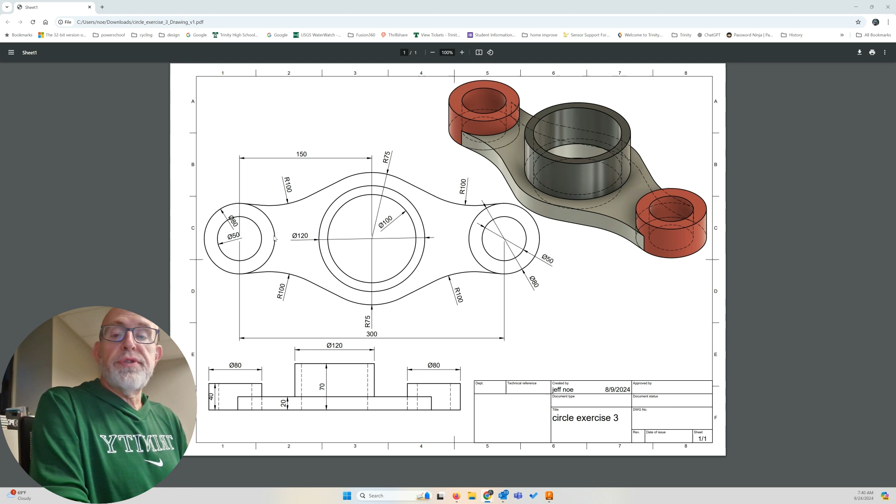We'll extrude this sketch 3 times. We'll extrude this and this. Those will go up 40 millimeters. And last, the center ring, that'll be extruded 70 millimeters. So let's get started. Move this out of the way. I've got a fresh canvas in front of me.

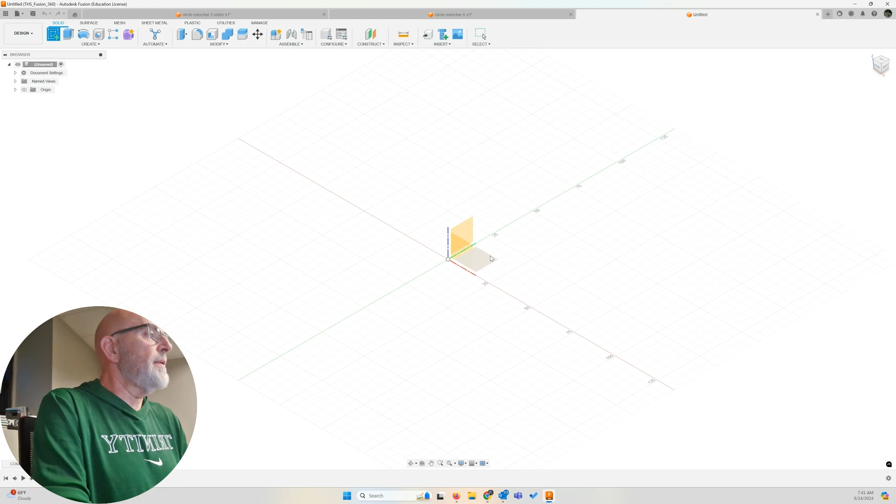All right, let's go create sketch. Top, bottom plane. There we are. You see top in the view cube up here. Let's draw our first circle from the origin at 100 millimeters center diameter. So center diameter circle, create circle, center diameter circle. Keyboard shortcut of C. You see the shortcut in the toolbar. There we are.

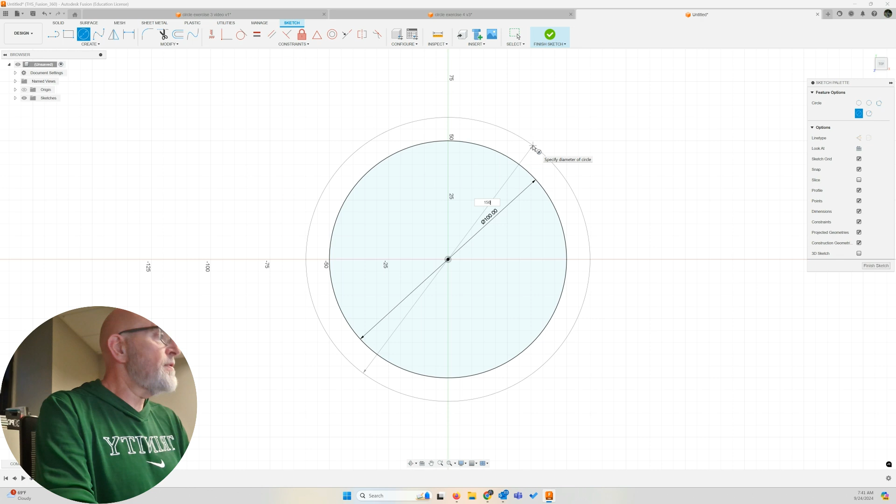All right, now let's draw a second circle, our radius of 75 from the design. Keep looking over there like you all can see it, and you can't see it at the moment. So 150 millimeters. And there's the outer circle. Of course, we're going to trim away sections of that.

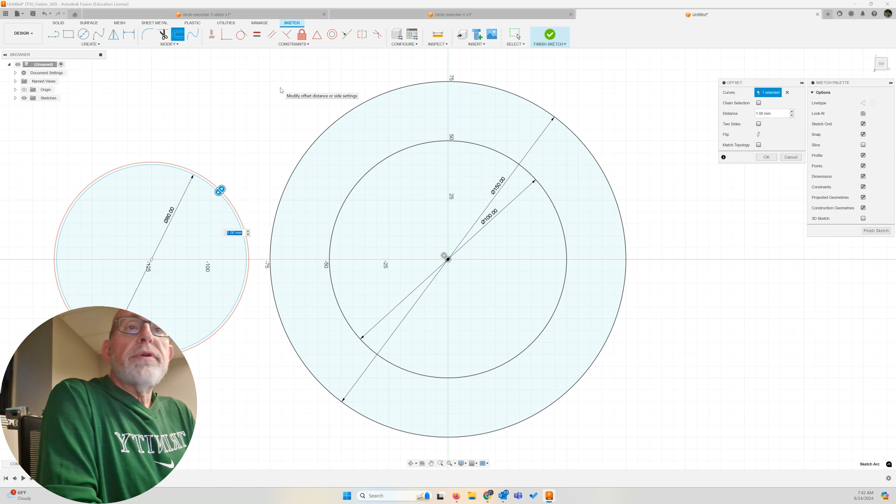Let's draw on the left side our smaller circle. So the first one's going to be 80 millimeters. 80 millimeters, all right. And we're going to offset that, modify offset. So the inner circle's 50 millimeters, 30 millimeters smaller, so our offset will be a negative 15 millimeters.

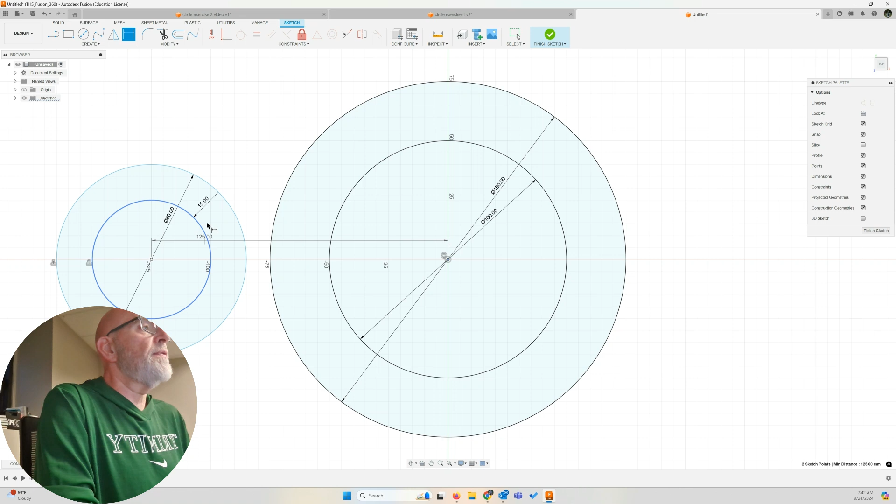Now let's position this circle. The distance between the center of this circle and the one on the other side is 300 millimeters. So from the origin, it's going to be 150 millimeters. So let's go sketch dimension, create sketch dimension, keyboard shortcut of D, the origin to the center of those circles. We'll set it to be 150.

I'm going to move my design over a bit. There we go. Zoom out just a touch, give me some more room. Okay, actually, let's move it up higher. I'm going to go create circle, center diameter circle. I need to create an arc with a radius of 100 millimeters that's tangent to these two circles. We haven't covered the arc tool yet, so we're going to use the circle tool.

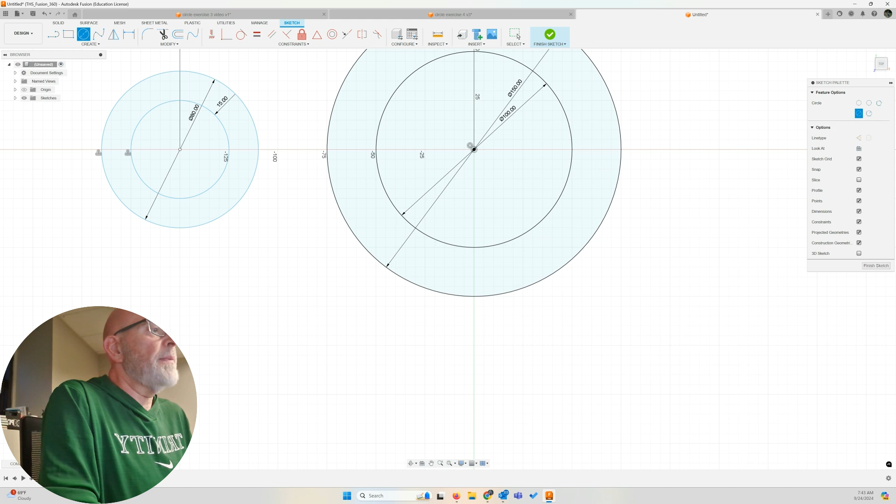Let's go create circle, center diameter circle, and I'm going to come down here and let's draw it with 200 millimeters in diameter. Let's go constraints, tangent. I want to make this circle tangent to this circle. There we are. And this circle tangent to that circle.

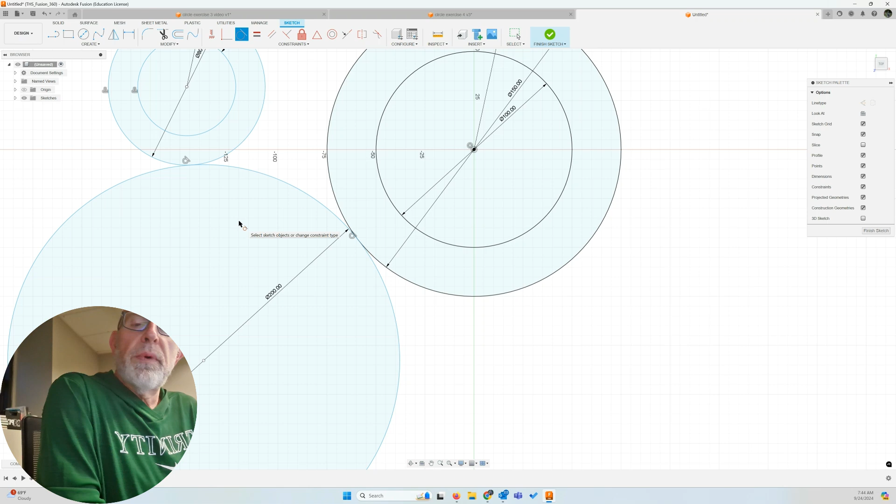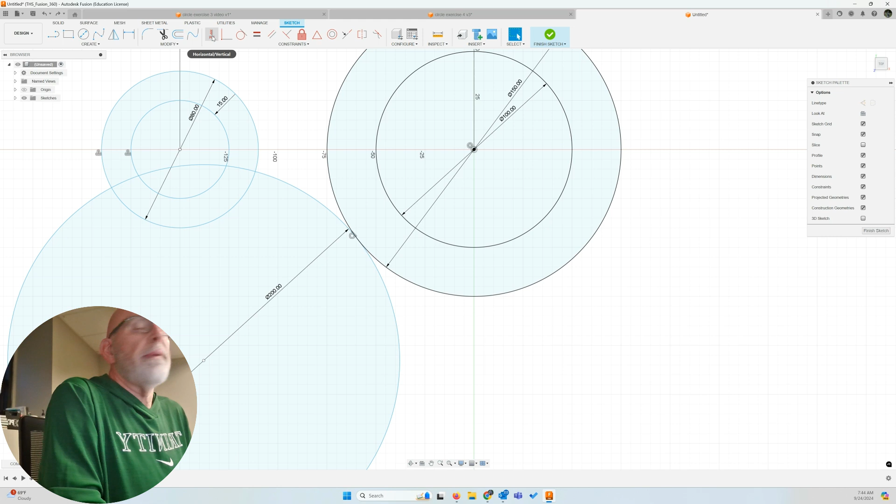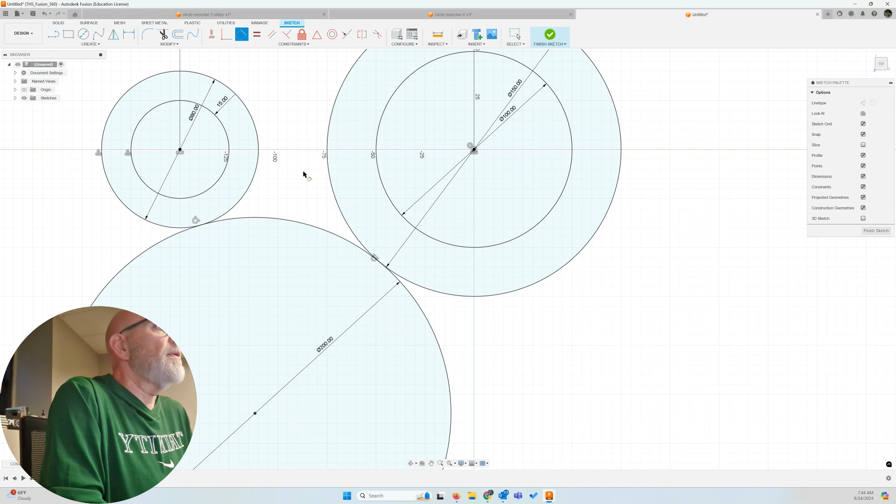Let's put a horizontal constraint on them. So let's go constraints, horizontal constraints, center of this circle, center of these circles. Let's make them horizontal. Now let's go back to the tangent constraint. Let's set this circle and this circle to be tangent. There we go. All right. So now let's go modify trim. Let's trim away that section.

Okay, so we can see we drew the circle out here because the dimension line's there, but all I left was my portion that combines those two. We're going to do some mirroring, so we need a couple mirror lines. Let's create a vertical and horizontal mirror line. Let's go from the origin, create line. Let's create a vertical one first.

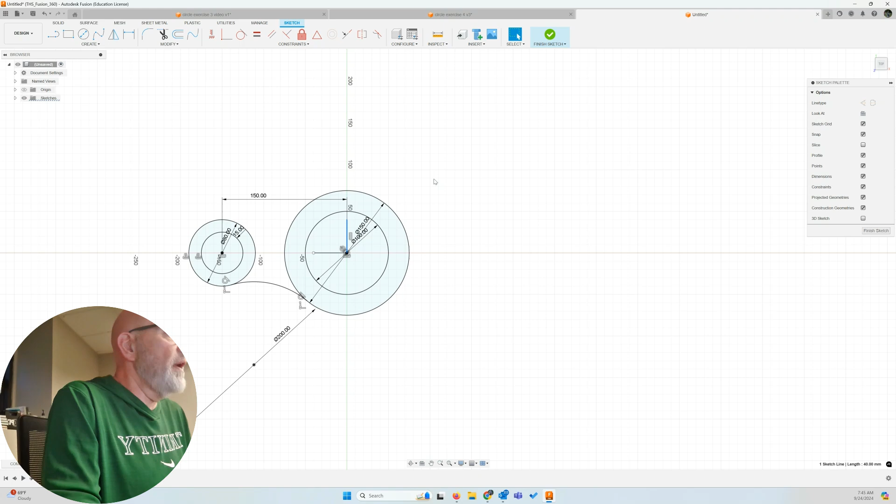Doesn't make any difference how far up you go. And let's then make a horizontal one. Escape out of the tool. Let's convert them to construction. So I've selected the line. I'm going to hit the X key. X converts it to construction.

Now, why does that not look like construction? It does look like construction when you get it selected, because we've got a dimension line running underneath of it, okay? Let's convert this one to construction. We won't have that problem here. There we are, construction lines. Now, let's go create mirror. And I'm going to mirror this arc to the top side.

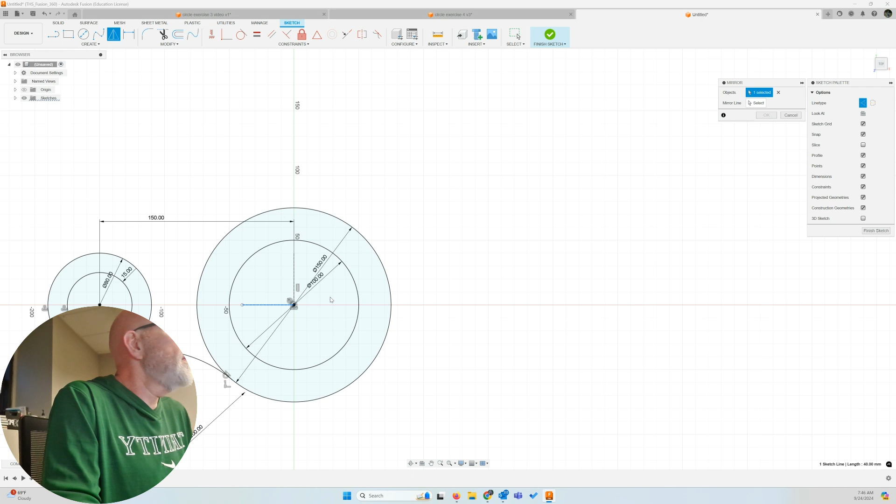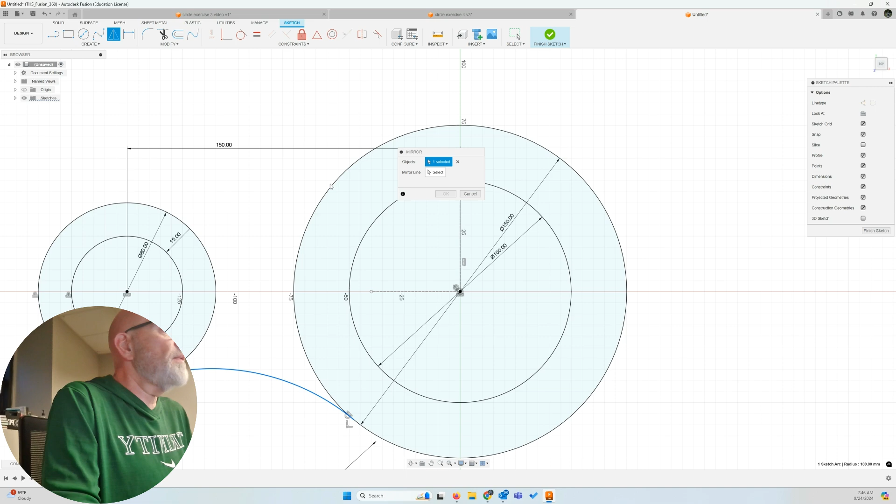So let's go create mirror. Since my mirror is vertical, I want the horizontal. So there's my palette. I've got that zoomed way out, don't I? So I've selected my object, right? Let's make sure, let's do that again, create mirror. So I'm going to select, there's the object I want to mirror, my mirror line. Since my mirror is vertical, I want the horizontal mirror line. There we are at the top. Click OK.

All right, now I'm going to select this, and these, and I'm going to mirror them to the other side. So it's going to be a horizontal mirror. Let's go create mirror. There's the shortcut. Click and drag over. Well, I didn't get it all, did I? So I'm going to manually select. So I've got this circle selected, this circle selected, this arc, and this arc.

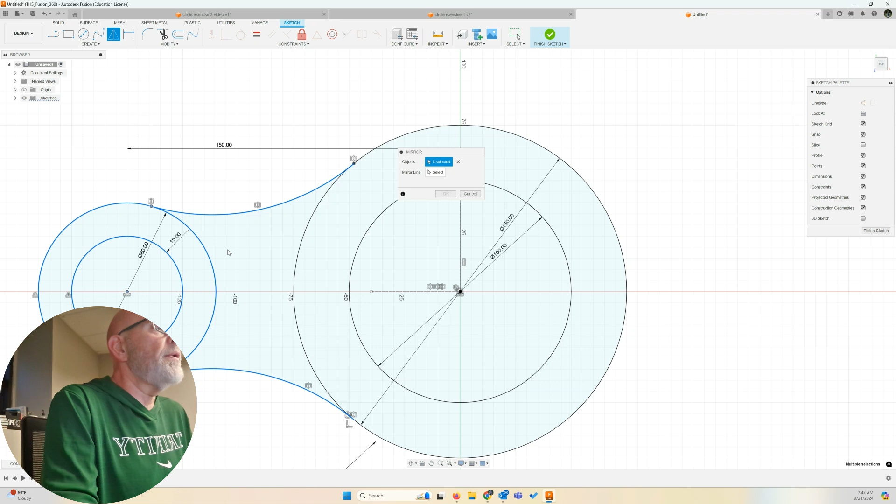I've selected some of the constraints and other things of that nature, so don't worry that it says 8. The important ones are these 4. 1, 2, 3, and 4. Let's select our mirror line. So I want the vertical one. There it is on the other side. Click OK.

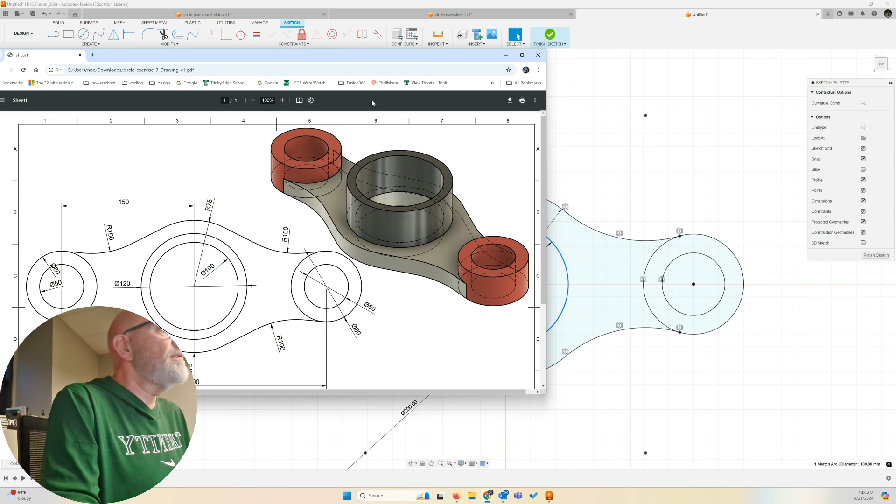Let's trim away this interior portion here so we get the middle section being an enclosed shape. Trim that away. Modify, trim. Trim it away. And now let's bring this back over. I need a second circle because that's what I'm going to extrude here. So I've got my 100 millimeter center diameter circle here. I want to offset it by 10 millimeters to give me a 120 millimeter circle on the outside of it.

So let's go modify, offset, keyboard shortcut of O. I had already selected my circle, it appears. There, now I've reselected my circle, 10 millimeters. That's going to give me a 120 millimeter center diameter circle. Click OK. See my offset there. There's my offset for the smaller ones. My sketch looks done. Let's finish sketch.

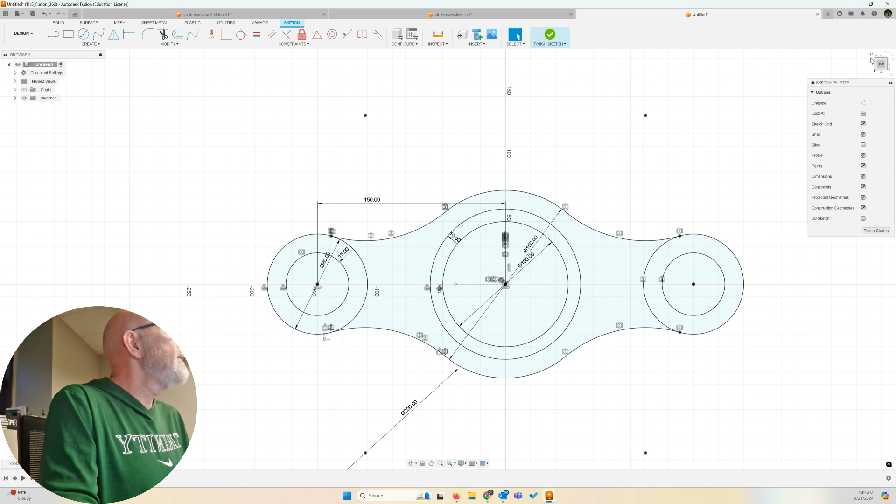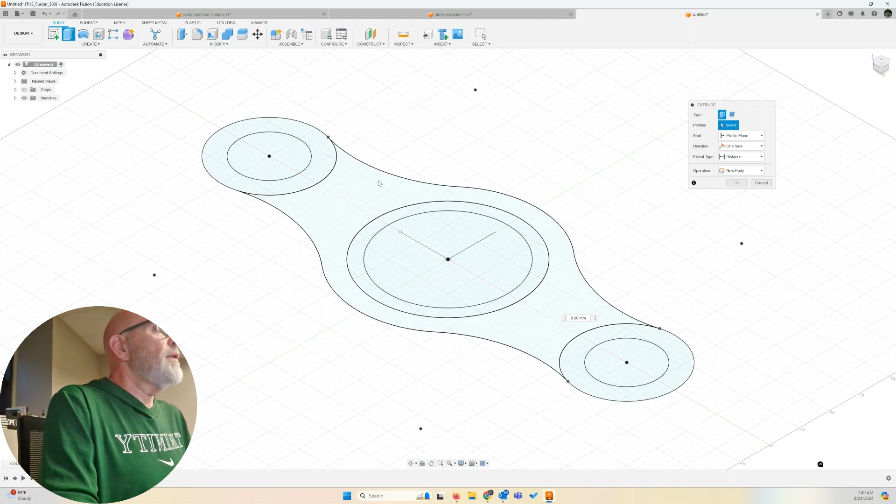Home position. Let's extrude. So this section, 20 millimeters. These on the outer edges, 40 millimeters. And this ring here, 70. So I'm going to select, let's go create, extrude, keyboard shortcut E. There's my extrude palette. I'm going to select this enclosed shape, the base, 20 millimeters. Click OK. All right, so I've got that part done.

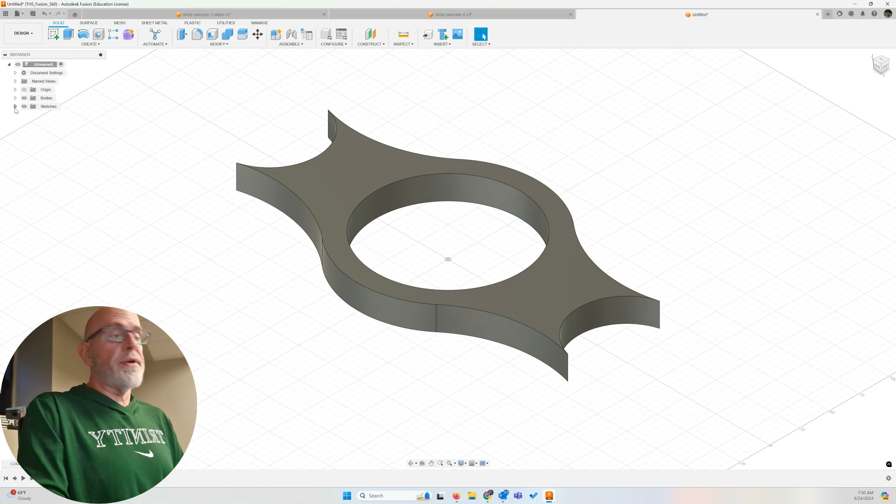I've lost my sketch. All right, we should be aware by this point in class how to get our sketch back. Let's expand sketches up in the browser. There we are. There's sketch 1. Let's click the eyeball, make it visible. Sketch 1 is back. Let's go extrude, keyboard shortcut of E.

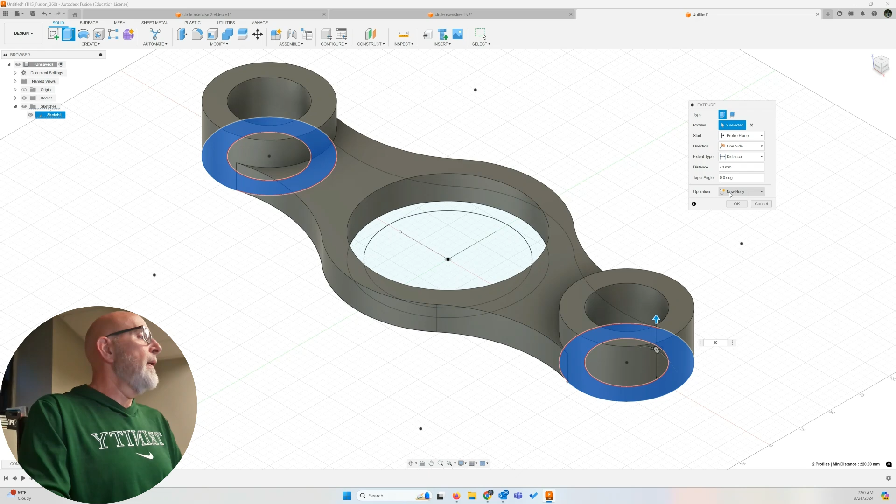I'm going to select my outer rings, and those will be extruded 40 millimeters. I want those to be a new body because I'm going to give them a different appearance. New body. Click OK. So if I expand bodies, I now have 3 bodies in my design. The last one will get a new body as well, so let's extrude it. It's going to go 70 millimeters.

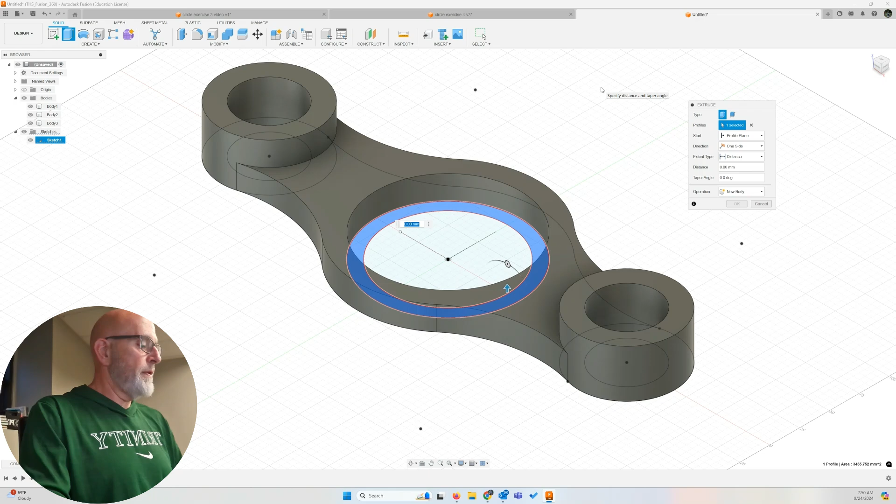Create extrude. Keyboard shortcut of E. Let's select this ring. There we are, 70 millimeters. New body. Click OK. Now, do not submit your assignment with the sketch visible. Okay, we're going to add appearances. So I'm going to hide my sketch. It's no longer visible. I'm going to bring my example back up.

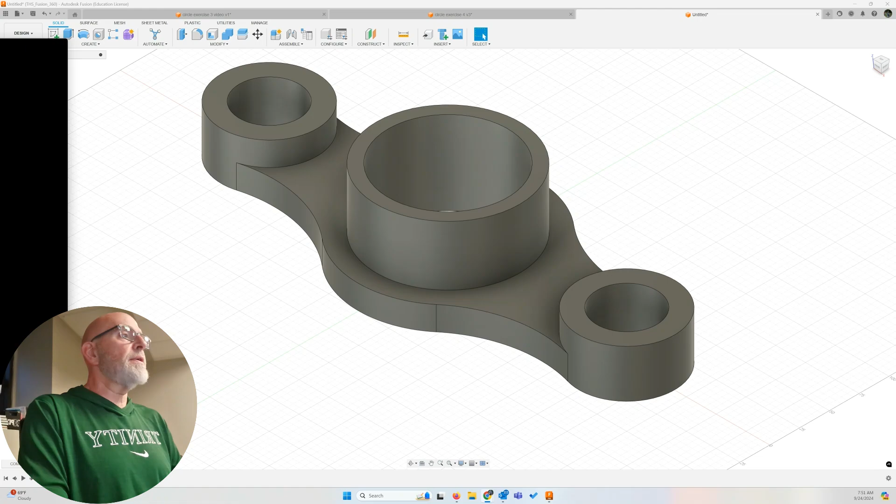Actually, here's a live example of it. Okay, this is, I believe that's a brushed, radial brushed titanium. This is an aluminum. I want to say that's stainless steel, were the metals I used. You can choose what you want to use. Provide appearances for the 4 bodies in your design and submit. Screenshot from the home position. Expand the browser so I can see your bodies and the fact that you only have 1 sketch.

All right, the assignment's under the circle tool and sketching, and this is circle exercise 5.